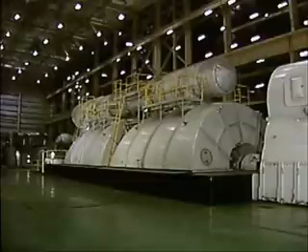Fluids under pressure perform many valuable functions in industrial applications. For example, turbines are powered by steam that's under tremendous pressure, and gases under pressure are used for welding. But if pressure becomes too great, it can cause damage and injuries.

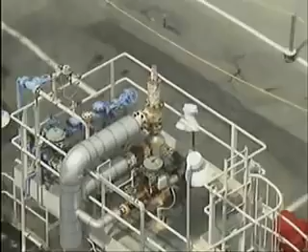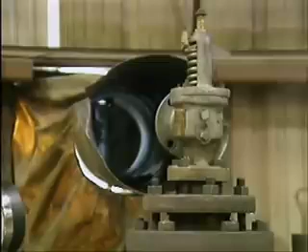To prevent such problems, a fluid system must have a means for relieving excess pressure quickly and safely. Various devices are used for this purpose. Rupture discs are often used in systems where problems with excess pressure are relatively unlikely. Relief valves, which open gradually, are primarily used in systems that handle pressurized liquids. In gas or steam systems, however, safety valves are used. They're able to quickly let out large volumes of gas or steam to relieve excess pressure in the systems.

Safety valves are commonly used on gas or steam lines because the volume of the gas or steam increases as pressure decreases, and a gas that's under pressure may expand to a tremendous volume when the pressure is relieved. One thing all safety valves have in common is that they open wide very quickly and stay open until the system pressure drops a predetermined amount below the point at which the valve is set to open. The valve allows a large volume of gas to escape as pressure is reduced.

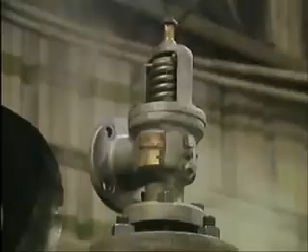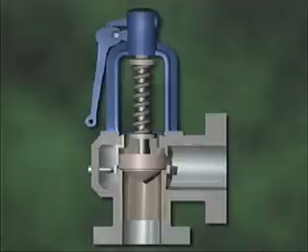In this part, we'll look at a huddling chamber safety valve. This type of safety valve is named for a small space called a huddling chamber that's located just below the valve's disc. The valve has an adjusting ring that's used to direct escaping steam either toward or away from the disc. The valve body directs the flow of pressurized fluid. The disc and seat seal the system closed under normal pressure.

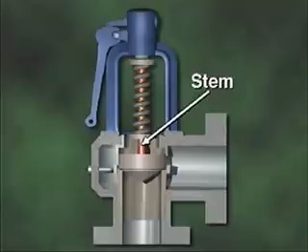The disc is mounted on a stem. A spring holds the disc in place, and the valve stem transfers tension from the spring to the disc. The release lever is used to trigger the valve manually while the system is operating to make sure that the valve works properly. The disc has a lip or shoulder that isn't exposed to system pressure when the valve is closed. The lip of the disc sits above the huddling chamber. The center portion of the disc, which is located over the valve's inlet, is always exposed to system pressure.

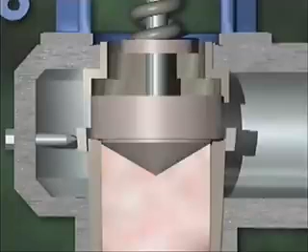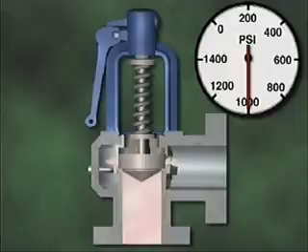The purpose of the huddling chamber is to help expose a greater area of the disc to escaping fluid when the valve opens slightly. The fluid pressure acting on the increased area gives a greater total lifting pressure against the spring. The pressure at which the valve's disc begins to lift off the seat is called the valve's set pressure. The pressure at which the valve actually pops open is the popping pressure. In most cases, simmering occurs briefly before a safety valve opens fully.

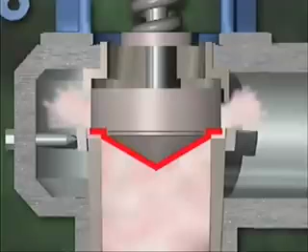During simmering, the disc is only slightly lifted and the valve discharges a small amount of fluid. Simmering lasts for only a fraction of a second until system pressure acts on the lip of the disc. As the disc lifts, the lip of the disc is suddenly exposed to system pressure. Since a larger area of the disc is now exposed to the pressure in the system, more force is being exerted on the bottom of the disc.

This increased force overcomes the spring tension and causes the disc to pop open to about a 60% open position. When the valve's popping pressure is reached, the valve should open with a clean and sudden pop. If the pressure in the system continues to increase, the velocity of the escaping fluid will also increase, causing the disc to gradually lift higher until it reaches the fully open position.

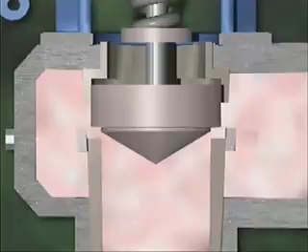Since the initial opening of the safety valve is about 60%, a large volume of fluid is allowed to escape quickly. After the excess pressure in the system has been relieved, the system pressure will begin to drop. As pressure decreases, the velocity of the escaping fluid also decreases. Spring tension begins to take over, pushing the disc down. The spring tension in a safety valve is preset, and it must be correct for the valve to operate properly.

When the system pressure drops to the point where the valve popped open, 1,000 psi in this case, the valve doesn't close, because the lip of the disc is still exposed to the pressure and velocity of the escaping fluid. When the system pressure drops to a predetermined value below the valve's popping pressure, the disc drops down on the seat, closing the valve. This predetermined value is the valve's reseating pressure.

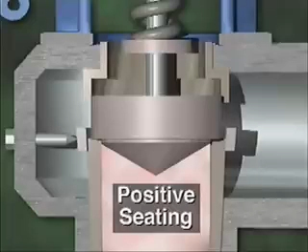Typically, as the force of the escaping steam is lost, the valve shuts suddenly. A small cushion of steam trapped in the huddling chamber keeps the disc and the seat from slamming together hard enough to be damaged as the valve snaps shut. When the disc is firmly in place against its seat, the valve is said to have positive seating. Positive seating is important because it keeps the valve from leaking fluid through the disc and seat.

The distance that a valve disc moves from the closed position to the fully open position is referred to as the valve's lift or travel.

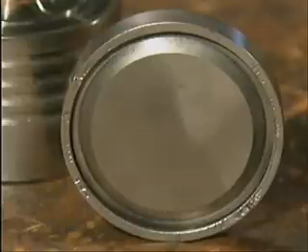Adequate blowdown helps prevent a condition called chattering. If there's no difference between a valve's popping pressure and its seating pressure, the valve disc will jump up and down on its seat until pressure either increases enough to pop the valve open again or decreases enough to keep it closed. This condition is called chattering because of the sound the disc makes as it moves up and down. Chattering can seriously damage both the disc and the seat because it promotes steam cutting, which occurs when the velocity and temperature of the escaping steam are so high that the steam cuts into the metal of the valve's disc or seat.

Blowdown can be adjusted by changing the setting of the valve's adjusting ring. The position of the disc in a safety valve is determined by the amount of system pressure and the angle and velocity of the steam striking the disc.

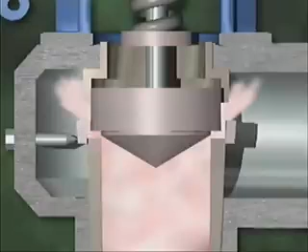When the adjusting ring is in the raised position, the escaping steam is directed right at the disc. The velocity of the escaping steam exerts a great deal of upward force because most of the steam is aimed to strike the disc closer to a 90-degree angle. In turn, the system pressure must drop well below the popping pressure of the valve before the spring can force the disc back onto its seat. So raising the adjusting ring increases the blowdown of the valve.

If the adjusting ring is lowered, it's easier for the steam to escape to the side of the disc, so much less escaping steam strikes the disc on its way to the valve outlet. The velocity of the steam exerts less upward force on the disc, and more system pressure is required to hold the disc open. So with the adjusting ring in the lowered position, the valve closes against higher system pressure than it did when the ring was raised. Lowering the adjusting ring, then, decreases the blowdown of the valve.

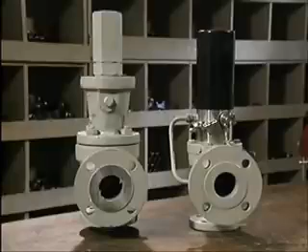In this part, we'll examine the components and operation of two specialized types of relief valves that may either function as safety valves or assist safety valves in protecting pressurized systems. The two types are safety relief valves and pilot-actuated relief valves. We'll begin with safety relief valves.

While safety valves typically discharge gases or vapors, safety relief valves discharge gas, vapor, steam, or liquid to prevent a predetermined safe pressure from being exceeded. Safety relief valves are commonly used in refineries, on systems that contain liquid vapor mixtures, and in some low-pressure steam systems. Some types of safety relief valves are suitable for use as either a safety valve or a relief valve, depending on the application. For instance, certain safety relief valves can be used as safety valves on air systems and as relief valves on liquid systems.

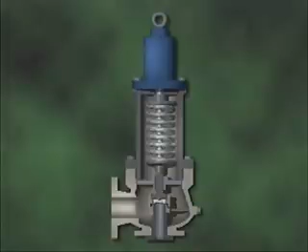This is a cutaway illustration of one type of safety relief valve that's specifically designed for use in gas or steam systems. It has a long nozzle-shaped inlet, a disc and seat, a reaction hood for directing the flow of fluid through the valve, and a single adjusting ring for changing blowdown.

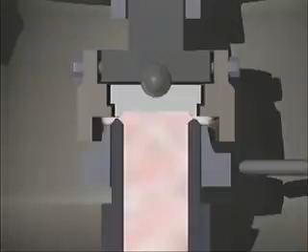The pressure of fluid directed against the disc lifts the disc off the seat. While the valve briefly simmers, the flow of the fluid as it discharges outside the valve's seating area increases the lifting force. Then the reaction hood deflects the discharging fluid downward. Creating a reactive force by deflecting the flow of the fluid further increases the lifting force and causes the valve to pop open. As system pressure returns to normal, the valve closes.

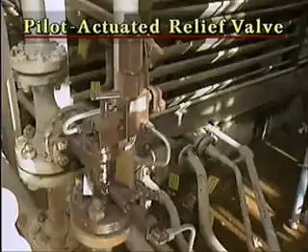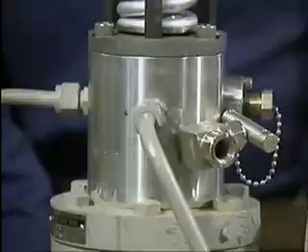Pilot-actuated relief valves operate much like safety valves. That is, they pop open rather than open gradually, and they have a predetermined amount of blowdown to prevent chattering. However, a pilot-actuated relief valve also has a separate pilot device that senses excess pressure conditions and causes the valve to open. This arrangement allows excess pressure to be detected in one part of a system, such as a steam line, while the valve protects another part of the system, such as the boiler.

Pilot-actuated relief valves are often used on gas and steam systems that also use safety valves. In such cases, the pilot-actuated relief valves are set to open at lower system pressures than the safety valves are. This arrangement saves wear and tear on the safety valves and prevents costly shutdowns that would be required for safety valve repairs.

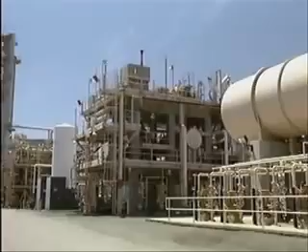By law, safety valves can't be isolated from the systems they protect, because of the damage that could occur if the systems were operated without protection. So whenever a safety valve is damaged, its system must be shut down while repairs are made.

Pilot-actuated relief valves, however, can be isolated from a system because they're not a primary part of the system's safeguards. So the pilot-actuated relief valves can be used and then repaired if necessary without having to shut down the system.

The valve also has a disc guide, which is a sleeve that aligns the disc with the seat. A small opening between the disc guide and the disc allows system fluid to pass through from the inlet to the bottom of the main disc.

Consequently, system pressure is exerted on both the top and the bottom of the disc during normal system operation. Spring tension is also exerted on the bottom of the disc. If system pressure increases, it increases on both sides of the disc, but the valve won't open because the pressure on the top of the disc counterbalances the pressure on the bottom, and spring tension holds the valve closed.

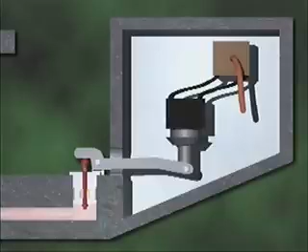The electrical relay closes an electrical circuit and energizes a solenoid. The solenoid then lifts a pilot valve, and the excess pressure is relieved.

The excess pressure that's relieved by the pilot valve comes from below the disc in the main valve. The amount of pressure that the pilot valve is capable of relieving is greater than the amount that could leak between the disc and the disc guide.

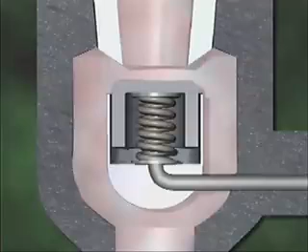When this pressure is relieved, the only pressure that remains on the disc is the pressure above it. With no counterbalancing pressure below the disc, the pressure above the disc easily overcomes the spring tension, so the valve opens to release system fluid through the outlet above the disc.

When system pressure returns to normal, the pilot valve closes. Pressure then builds up again below the main valve disc and helps the spring hold the disc closed.

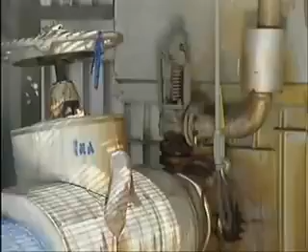External inspections of safety valves are conducted when a problem is suspected, and also when routine preventive maintenance or testing is scheduled. In this part, we'll see a typical external inspection, and we'll look at hand lifting a valve when the external inspection indicates that certain problems may be present.

In preparation for an external inspection, check the operating history of the valve. This will give you an idea of specific problems that you should watch out for during the inspection.

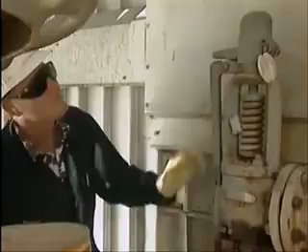Next, proceed with a step-by-step external examination of the different parts of the valve. For this two-ring huddling chamber safety valve, first check the lock wire on the adjusting ring pins. The lock wire is fastened in place with a metal clip as the final step in the valve reassembly procedure. So the presence of the metal clip is a sign that the adjusting rings should still be properly set for operation.

If the metal clip is missing, or if the lock wire has been tampered with, the valve set points may not be correct. Then you must have the valve taken to the shop to check the adjusting ring positions, and if necessary, reset them.

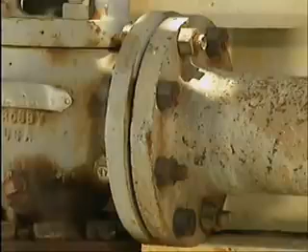Check for signs of leakage or leak-through at the discharge piping flange bolts and possibly around the yoke or bonnet bolts. Some valves have a yoke and a bonnet that are two connected pieces. Others, like this one, have a single piece that may be called either a yoke or a bonnet. For consistency, we'll use the term yoke.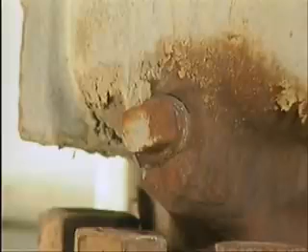Also inspect the top or cap of the valve. Next, look for steam or warm condensate leakage around the drain plug and around the bolts on the yoke. Check the temperatures of the valve and the discharge piping.

Another way to detect leakage is to check the exhaust pipe from the valve. When you make this check, be very careful not to place any part of your body over the exhaust path from the valve. If the valve were to lift unexpectedly, you could be severely injured. If steam is being discharged from the exhaust pipe, the valve is definitely leaking.

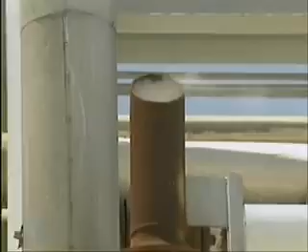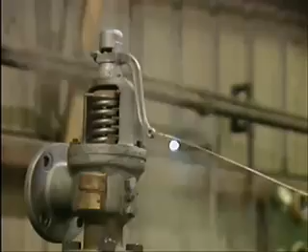An external inspection may reveal that a valve is leaking between the disc and the seat. This could occur if the valve didn't reseat correctly after the last time it popped, or it could be caused by foreign matter, such as ash, dirt, or rust particles trapped between the seat and the disc. In many cases, you can correct either of these two causes of leakage by hand lifting the valve. Hand lifting clears foreign matter out of the valve and gives the disc a chance to reseat properly.

But anytime a safety valve is lifted, there's a corresponding drop in system pressure. So before you hand lift a valve, notify the appropriate operating personnel so they can compensate for the drop in system pressure and keep it from interfering with normal operations. If operating personnel aren't forewarned, when pressure drops as you hand lift the valve, they might take emergency measures to raise pressure or shut down the system. Such actions could be costly and perhaps dangerous.

Likewise, before hand lifting a valve, you must take appropriate personal safety precautions. Attaching a hook to the valve's release lever enables you to position yourself as far away from the valve as possible. This is important because when you hand lift the valve, a great deal of hot, pressurized fluid could be released. To lift the valve, pull the hook hard enough to open the valve all the way.

You should hold the valve open for only 2 or 3 seconds. If you hold it open any longer, the disc could be damaged by the rush of steam. After the valve closes, repeat the inspection procedure to check for leaks and more heat than would normally be expected after hand lifting. If the valve seats properly after lifting, it should start to cool down immediately.

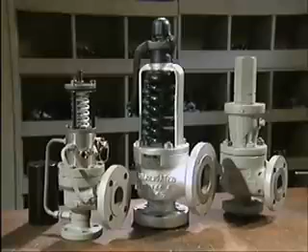If the second inspection indicates the problem wasn't solved by hand lifting the valve, or if hand lifting wasn't a possible solution for the initial problem, you'll need to follow your plant procedures to have the valve examined and the problem corrected. If an external inspection of a safety valve reveals problems, you'll usually need to disassemble the valve and inspect its internal components. You'll need to follow your facility's procedures and the manufacturer's instructions for the exact steps to disassemble the specific valve that you're working on, but there are some general procedures that apply to most types of safety valves.

We'll look at typical procedures for the disassembly and inspection of a 2-ring huddling chamber safety valve that has been removed from service and taken to a shop for repairs.

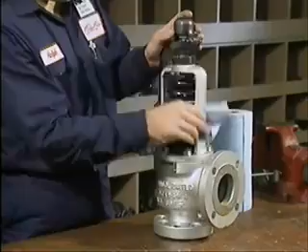First, prepare the work area. Gather all the necessary tools and check the valve's nameplate data so you can locate reference material and order new parts. Clean the outside surfaces of the valve. Cleaning makes the valve easier to handle. It also prevents dirt and corrosion particles on the outside of the valve from getting inside when the valve is taken apart.

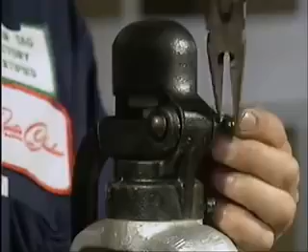To begin disassembling the valve, you must remove the release lever assembly. First, take out the cotter pin that locks the pivot pin in place. Then pull the pivot pin out. As each part is removed, set it aside in a safe place so it won't get damaged.

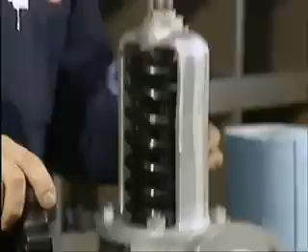Next, take off the release lever and then the cap that protects the top of the stem from getting dirty or being bent. Then break the lifting nut and the lock nut free, turn them off the stem, and set them aside.

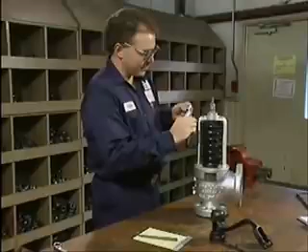The next part to be removed is the compression screw. The compression screw is precisely adjusted to maintain the exact amount of tension on the valve spring that's needed for the valve to function correctly. For this reason, you should carefully measure the screw's position. Write the measurement down so you can refer to it later when you reassemble the valve and must return the screw to its original position.

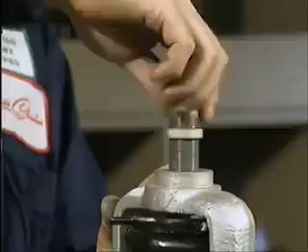Now break free the lock nut that holds the compression screw in place and turn the nut to back it out of the yoke. Then lift the lock nut and the compression screw off the stem and set these parts aside.

First, break the yoke nuts free and remove the nuts from their studs. Then lift the yoke off the valve body. Handle the yoke carefully so that it doesn't bang against the studs or the stem and perhaps damage them.

Remove the spring and the spring washers from the yoke and set them aside. The next parts to be removed are the stem and the disc.

In this case, the two parts are connected, so they're removed together as a unit. Lift the parts straight up out of the valve body to prevent the disc from banging against the sides of the casing and being damaged. Separate the parts by unscrewing the disc from the stem.

Set the disc aside carefully, with its seating surface up so it isn't damaged by contacting the surface of the work table. Place the stem on V-blocks to protect it from being dropped or otherwise damaged.

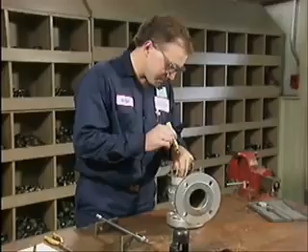Now you can remove the upper and lower adjusting rings. The positions of the rings are critical to proper valve function, so you must take measurements to record their exact locations. Measure and record the position of the upper ring first.

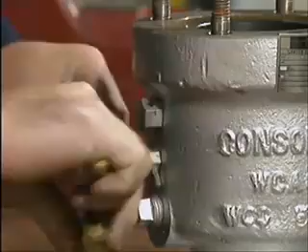Then cut and remove the locking wire that's on the upper and lower ring locking pins. The locking pins fit into notches in the upper and lower adjusting rings. Break the upper locking pin free and remove it from the valve body. Then unscrew the upper adjusting ring and set it aside.

Now repeat these steps to remove the locking pin for the lower adjusting ring and measure the exact position of the ring.

Insert a screwdriver through the lower locking pin hole and unscrew the ring by turning each notch past the pinhole until the ring is flush against the rigid rule that was placed on the valve seat to take the measurement. Count each notch as it moves past the pinhole while the ring turns.

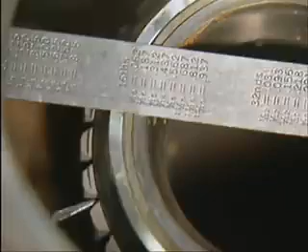Write down the total number of notches that you counted. This number will be used to install the ring correctly when the valve is reassembled. Remove the rule and unscrew the lower ring until it disengages from the threads on the valve body. Then set the ring aside.

Finally, follow your facility's procedures or the valve manufacturer's recommendations to clean all the disassembled parts.

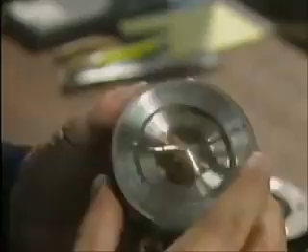We'll look at the disc first. Check it carefully for cracks. Even the smallest crack can rapidly become large enough to allow a valve to leak. A disc that's cracked must be replaced.

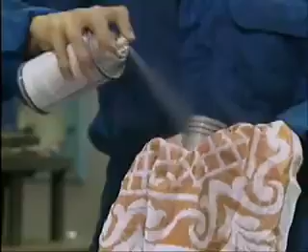Dye penetrant testing is one way to locate surface cracks and flaws in the disc and other valve parts. To do this, first clean the disc. Then apply the dye penetrant oil, which is a mixture of light penetrating oil and dye.

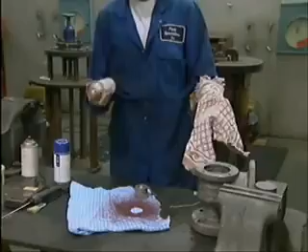After allowing time for the dye-penetrant oil to be drawn into surface cracks, wipe the excess oil off with a clean cloth. Then apply a light mist of a dye-penetrant surface cleaner on a cloth, and use this cloth to clean off the disc. Only the dye in the cracks will remain.

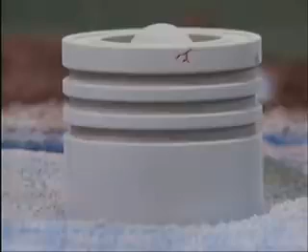Now, coat the surface of the disc with a developer, which is a substance that draws the dye back out of the cracks. Any cracks or flaws that are present show up in the developer.

Also check the disc for steam cutting. If steam cutting is severe enough to allow leakage, you'll have to replace the disc. But if the damage is relatively minor, you can often restore the surfaces by lapping them. You'll need to follow the appropriate lapping method for the shape of the disc.

If the damage isn't severe, you can probably restore the surface of the seat by lapping. As with the disc, you must use the appropriate lapping method for the shape of the part. When you're done lapping, clean all traces of lapping compound off the valve seat and all other internal surfaces of the valve. Then wipe any remaining residue off with a clean cloth.

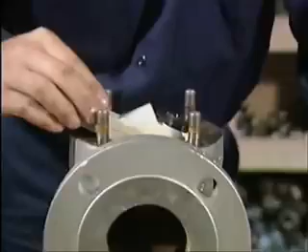Now, use a light or bluing to inspect the clean seat for any nicks or uneven spots. If you find such imperfections, you'll need to repeat the lapping process until the surface is smooth and even.

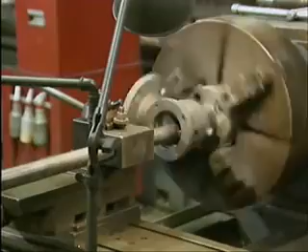A valve seat may, however, be so severely damaged that you can't restore its surface by lapping. If the seat is a permanent part of the valve body, you can often use a reseating tool that's specifically designed to restore the damaged surface, or, as in this case, you can mount the valve in a lathe and remachine the seat. However, keep in mind that extensive maintenance on a valve seat may also affect other valve components and valve specifications, such as the lift.

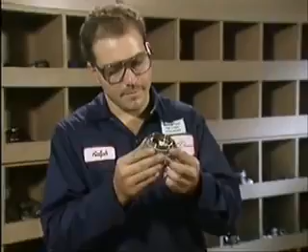Next, check the adjusting rings for nicks, cracks, damaged threads, and steam cutting. Inspect them carefully, because any damage might cause them to fail when the valve is returned to service. Damaged adjusting rings should always be replaced.

It's also important to check the straightness of the valve stem, because a bent stem is a common cause of valve malfunctions. A bent stem can prevent a valve from opening, or it can keep an open valve from reseating properly when system pressure returns to normal. Two common causes of bent valve stems are careless handling and improper gagging.

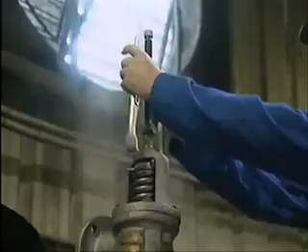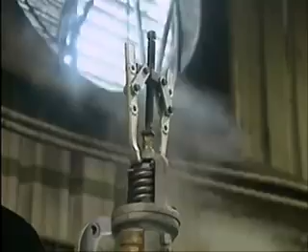Gagging is the act of attaching a device called a gag to a safety valve to keep the valve from opening. Gagging is usually a preparation for the testing that's done before a reassembled valve is returned to service. Proper gagging procedures are covered in the part of this topic entitled Reassembly and Testing.

A common way to test a stem for straightness is to take a runout reading with a dial indicator that's mounted on a magnetic base. With the stem set up on a pair of V-blocks, place the dial indicator beside the stem and secure the dial indicator's base in position.

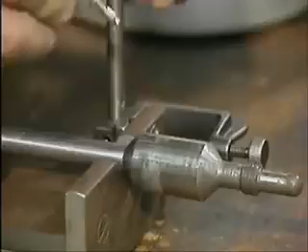Next, press the stem of the dial indicator against the surface of the valve stem until the dial indicator's stem retracts about 1/4 of its length. Set the dial indicator to 0 to provide a reliable reference point for the reading.

Rotate the valve stem slowly while you watch the dial. Be careful not to bump the valve stem or the dial indicator. Compare the maximum change in the reading on the dial indicator with the specifications given by the manufacturer.

If the runout is within the specifications, you can reinstall the valve stem. But if it isn't within the specifications, this indicates there's an irregularity in the shape or the straightness of the valve stem, and you must replace it.

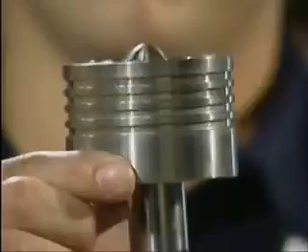Also inspect the valve stem carefully for cracks and other signs of damage. The end of the stem that fits into the disc must be smooth and round, because it acts like a ball and socket joint inside the disc, so that the disc can align itself properly with the valve seat without damaging the stem. Flat spots on the disc end of the stem can cause uneven contact and unwanted friction between the stem and the disc.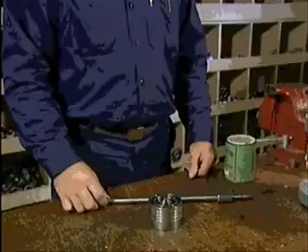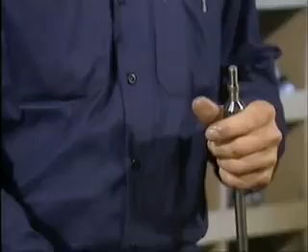If either the stem or the disc is replaced or has any flat spots, you must lap the two parts together. This lapping process is called grinding in. Apply a thin layer of abrasive compound to the end of the stem and use a rotary motion to grind the stem into the disc. The grinding in continues until smooth, even contact is obtained between the stem and the disc.

After a safety valve has been disassembled and its internal components have been inspected, the valve must be properly reassembled and tested before it's returned to service. The valve reassembly procedure is basically the reverse of the disassembly procedure, but there are a few tasks specifically associated with reassembly that you should be aware of. One of the first steps in safety valve reassembly is making sure that you have all the correct replacement parts and that the parts are in perfect condition.

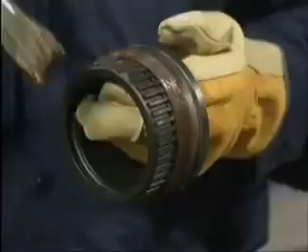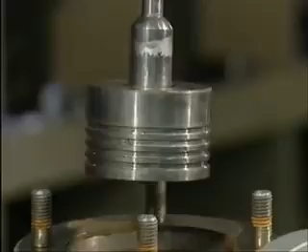Lubrication is also an important part of reassembling a safety valve. You should follow the valve manufacturer's specifications for the exact type of lubricant and the method you should use to apply it. Typically, an anti-seizing compound is used to lubricate threaded surfaces so they won't stick together or seize as a result of temperature changes during valve operation. Also, during reassembly, it's absolutely critical that the disc and the valve seat make perfect contact so steam can't leak through the valve.

Once you've completely reassembled a safety valve, you must test it to make sure that it's working properly before you return it to service. As with all other aspects of safety valve maintenance, you must follow your facility's procedures or the manufacturer's instructions for the specific valve that you're testing. But we can cover some general concerns that apply to most valve testing situations.

Before you can test the valve, you must reinstall it. Take the appropriate safety precautions and follow your facility's procedures to make sure that the installation is done correctly, so you prevent leakage and other problems.

Next, prepare to perform the necessary tests. An important preparation for many testing procedures is gagging the valve. Gagging involves installing a device called a gag that keeps the safety valve from opening during testing. We'll look at a typical procedure for installing a gag on a 2-ring huddling chamber safety valve.

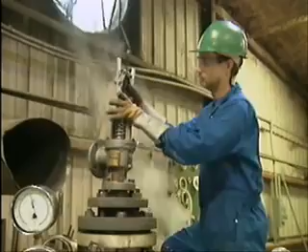The valve's release lever and the protective cap have been removed, so the top of the valve stem is exposed. Now, align the stem of the gag properly with the valve stem. Then, attach the jaws of the gag firmly to the yoke to prevent the gag from slipping. Finally, tighten the gag finger tight only. Never use a wrench on a gag.

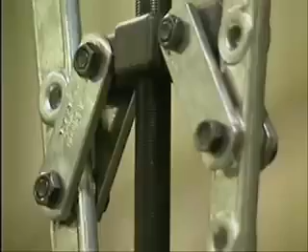Gagging a valve improperly can be disastrous. Damaged valve parts or serious injuries can result if a gag were to slip and the valve open unexpectedly. So it pays to keep in mind some basic safety tips about gagging.

Never apply a gag to a cold valve that will be heated. The valve stem expands considerably as temperature increases, and if the stem isn't free to expand, it will be bent. Never leave a gag on a safety valve during normal system operation, because a gag makes a valve inoperative, and

the system or equipment that the valve is installed on will be unprotected. Finally, many plant systems contain several safety valves. When you test the popping pressure of any of these valves, you must gag the valves that are set to open at a lower pressure than the valve that's being tested.

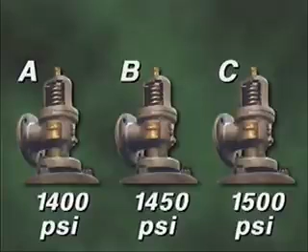For example, assume that a system contains these 3 safety valves. Valve A is set to open at 1400 psi, valve B at 1450 psi, and valve C at 1500 psi. If you're going to test valve C, you must gag valves A and B, because the popping pressures of A and B will be exceeded during the test of valve C.

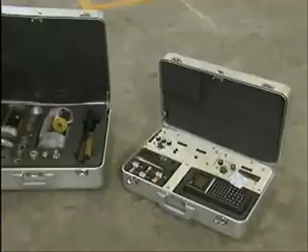Safety valve testing typically includes testing popping pressure. Popping pressure can be tested either by raising system pressure or by using an auxiliary device such as a hydraulic jack to lift the stem.

If you use system pressure to test the valve, you should first lift the valve by hand to warm it. This helps ensure that the metal parts of the valve are at the same temperature before you start testing the valve to check its popping pressure. The parts will then expand and contract at the same rate during the test.

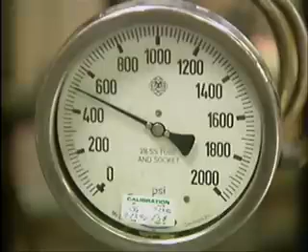In any case, when you're testing popping pressure, you're checking whether the valve opens when it's supposed to. If it opens too soon or too late in relation to the valve's set point, you must make adjustments.

For this huddling chamber safety valve, you make set point adjustments by turning the compression screw. But before you can do that, you must lower the pressure so that there's no chance of the valve opening accidentally while you're working on it. You must also break the lock nut free. If you try to turn the compression screw without loosening the lock nut, you'll probably damage the screw.

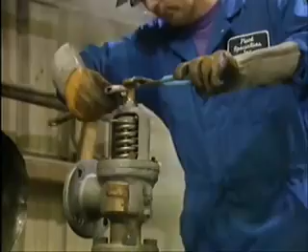Which way you should turn the screw depends on whether the valve is opening too soon or not soon enough. For example, if the valve is opening too soon, you should tighten the compression screw by turning it clockwise to increase tension on the spring. On the other hand, if the valve is opening too late, you should back the screw off a bit by turning it counterclockwise to relieve some of the tension on the spring.

After you've adjusted the compression screw, test the valve again to see if it's been set properly. Usually, you need to make several adjustments and tests to fine-tune the set point of the valve.

If testing indicates that blowdown has been changed, you'll need to readjust it. To make blowdown adjustments of this huddling chamber safety valve, you must raise or lower the adjusting rings until the blowdown is within specifications.

Safety valves may also be affected by hydrostatic testing that's done on the system or equipment that the valves protect. A hydrostatic or hydro test is done to determine whether or not the system can tolerate excessively high pressure in case of an emergency. It also helps you detect leaks.

Hydro tests are often performed at system operating pressure and below safety valve set pressure. But in some cases, during hydro testing, system pressure is raised above the normal popping pressure of the safety valves in the system. Then, gags must be installed on the valves before the hydro test is begun.

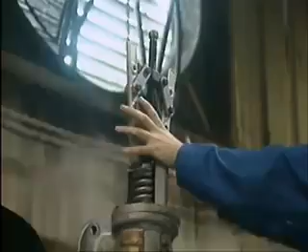If the gag on a safety valve is properly aligned and tightened, the valve won't leak during hydrostatic testing. But if the gag isn't installed properly, the valve will lift slightly during the test and sizzle. If this occurs, you should reduce system pressure until the valve closes. Then you should adjust the installation of the gag. Trying to pinch off leakage by tightening the gag without lowering the pressure could damage valve parts.

After you complete a hydrostatic test, you should remove the gag when system pressure has been reduced to 85 to 90% of the valve's set pressure. Never leave a gag on a valve during normal system operation, because a gag makes a valve inoperative and leaves the system or equipment that the valve's installed on without the necessary protection from excess pressure buildups.